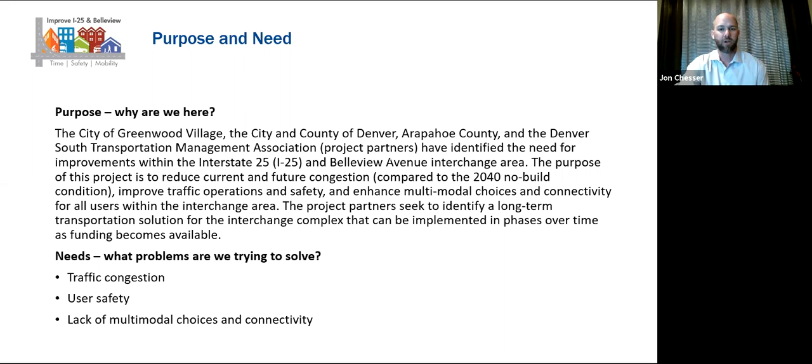Are we answering these questions? Are we staying true to why we're here and what problems we're trying to solve? And we've been able to do that, and this has been a good guide for us throughout that process.

So I'm going to talk a little bit here about the evaluation criteria. Another piece that was consistent throughout, after we developed the purpose and need, was: okay, how are we going to evaluate these alternatives? First, against the purpose and need, making sure that it meets that and checking for fatal flaws, and then looking at comparing alternatives against each other. What metrics are we going to use? What performance metrics are going to be available for us to look at? This was settled on by the entire technical advisory committee and then eventually the executive committee as well.

We were looking at traffic operations, safety, and multimodal for pedestrians, bicycles, and transit. Community impacts was a huge part of the conversation, from access to environmental, right-of-way, and then construction and constructability. Those are very important pieces in deciding which alternatives operate better than others as we move through the screening process.

And then, of course, cost. Cost is a big factor. Money doesn't grow on trees. We all understand the financial situation that we find ourselves in this industry. Money is limited, and so we have to be smart about how we spend it. Cost was a part of our conversation.

So it's really important to understand that both the purpose and need, and the evaluation criteria here, once developed in late 2018, stayed consistent all the way through. As we got into different conversations from a technical standpoint, it was important to bring ourselves back and say, hey, are we staying true to these performance metrics that we agreed on? Have we answered all of these questions as we go through the process?

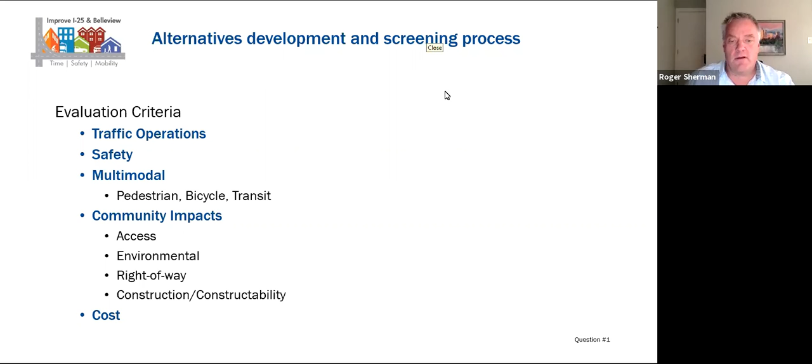We'll give it a minute to let everyone vote that's on the meeting before we close this out. We're moving along quickly, got about half of you voted. All right, last call for those that would like to vote. We appreciate your input. I'm going to end the poll and I will share the results with everyone, and hand it back to Jon.

Thank you, Roger, really appreciate that. And thank you everybody for participating in the poll. This information is really important for us to understand how the process that we've been executing matches up with the values and priorities that the users of the interchange have. It will help us give context to the comments and questions we get throughout this public involvement period. There's really interesting information here. It looks like pretty clear favorites toward traffic operations and community impacts. That's pretty consistent, and I think that's great information.

So again, thank you all. We will have two more poll questions as we go through the presentation here, so please look for those. We'll bring Roger back on to execute those for us.

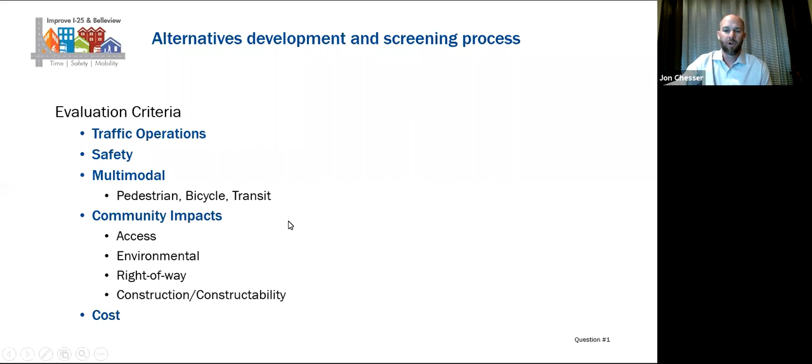All right, so back into the presentation here. We went through a three-tiered alternatives development and screening process, and I'm going to go through the details. A lot of that information is on the full presentation video from October 7th, up on the project website, where we go into a tremendous amount of detail about each of these screening areas. What's important to understand is that we start with a wide range of alternatives.

We compare those against the purpose and need, making sure they meet the answers to the questions. Level one is based on fatal flaw: is there anything in the alternative that makes it a fatal flaw? It simply can't be built, isn't possible, can't be constructed, something like that. We only had two alternatives screened out from a fatal flaw perspective: new crossings of I-25 from the landmark south of Belleview, and those were felt by the project team, everybody involved, to be a fatal flaw.

Then we moved into level two screening, a qualitative analysis. There were about 10 interchange alternatives that made it through to level two. The important thing here is to understand we're no longer comparing alternatives against a fatal flaw or against purpose and need — these have all been demonstrated to meet those requirements. Now we're comparing alternatives against each other, so it's a matter of how well the alternatives operate compared to the other alternatives in the list. It's not that some alternatives screened out on level two wouldn't work, they just wouldn't work as well as the alternatives that made it forward into level three.

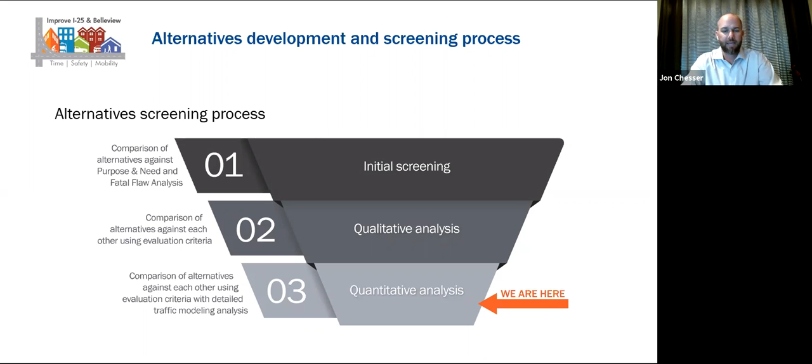We're here towards the end, wanting to present the information to the public, get feedback and comments on the process, and see where we are before that final decision is made. So let's jump right in.

Before I dive into the SPUI, one of the alternatives that made it through to level 3 screening was a diverging diamond interchange. Early on in the quantitative traffic analysis, that alternative was found to not measure up. In fact, it was operating worse than the no-build condition, meaning if we do nothing out here. Any alternative operating worse than no-build doesn't make sense to pass forward, so it was screened out early in level 3, leaving us with 2 main build alternatives and the no-build, which we put through detailed traffic analysis.

The first of those is the SPUI, a split diamond or single point urban interchange, affectionately called the SPUI. It takes the 2 ramp intersections that exist today, the I-25 ramp intersections that come down to Belleview, and consolidates them into 1 intersection underneath the I-25 bridge. Those 2 ramps converge to a point under the I-25 bridge. This helps traffic operations immensely because it takes 4 signalized intersections and makes them 3. Just by removing 1 signalized intersection, you get a benefit of operations on Belleview Avenue itself. That's the big key to a single point and why it was so effective in our analysis.

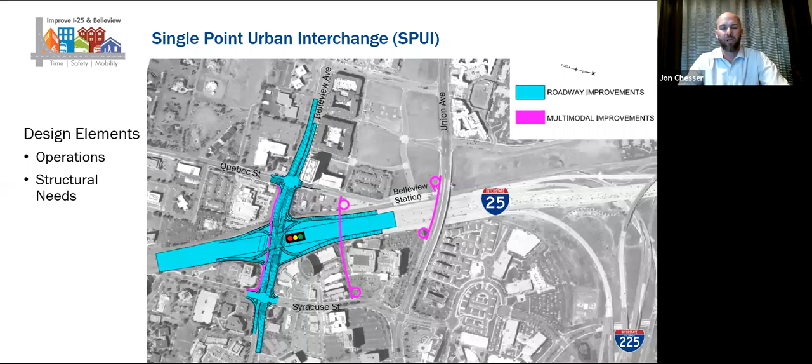All right, back to the SPUI. How is this thing going to operate? In order to build the SPUI, we need some pretty significant reconstruction on Belleview itself. This is important to note because lanes are being added and different lane configurations incorporated, which will impact Belleview Avenue during construction. It's an important piece for users of the interchange to be aware of.

Significant reconstruction of Belleview Avenue is necessary because all of the improvements in a single point are on that main road, Belleview Avenue in this case. So the light blue here indicates where that reconstruction would need to take place on Belleview.

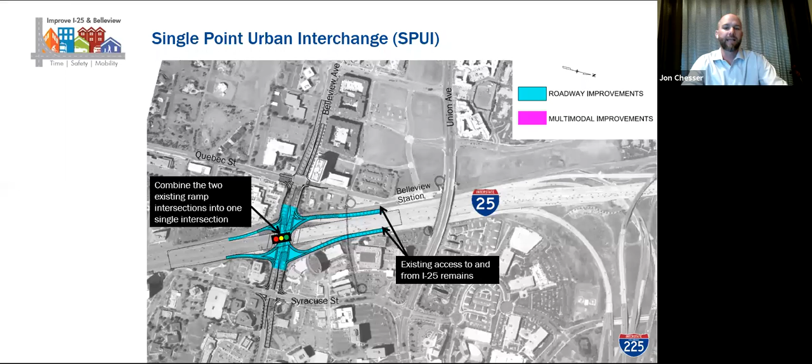This slide indicates where those ramp terminals come in. So all 4, southbound and northbound, will come into that single point, that single intersection underneath the I-25 bridge, which we talked about earlier, and again is part of the benefit that you get in traffic operations, consolidating from 4 intersections down to 3.

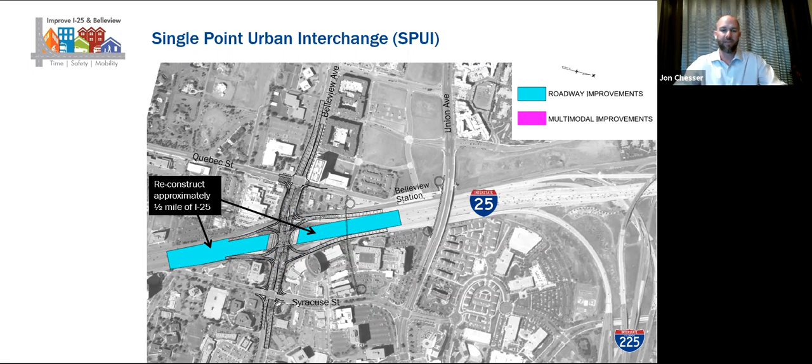In order to provide that intersection underneath I-25, about a half a mile of I-25 is going to need to be reconstructed as well. This extends about a quarter mile north and south of Belleview itself. And the reason I-25 needs to be reconstructed is that the bridge, the I-25 bridge over Belleview, needs to be replaced.

This is because in order to create the SPUI underneath, the bridge needs to raise in profile by about 8 feet. Now, it's important to note that CDOT has told us, as a project partner all the way along, this bridge does not need to be replaced. It's not structurally deficient. It meets all of its safety requirements.

So it's a good functioning bridge today and doesn't need to be replaced. What requires the replacement is that full interchange underneath I-25. Profile of I-25 at the bridge needs to go up 8 feet, and that needs to chase out a quarter mile in each direction to be able to tie into the existing grade of I-25. So the SPUI requires reconstruction of Belleview Avenue and a small reconstruction here on I-25 as well with the bridge.

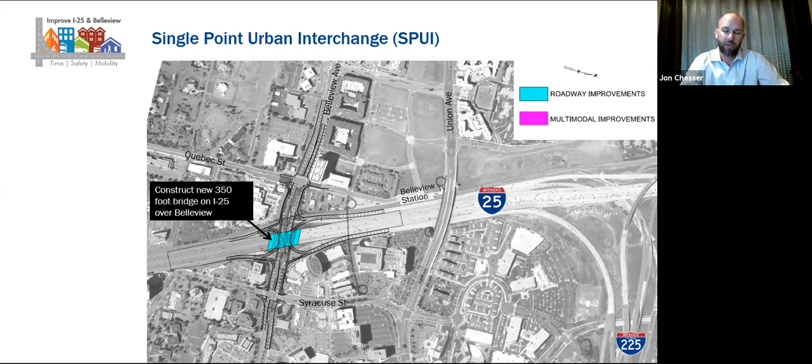So let's talk about the SPUI itself, technical advantages of the SPUI. Again, this is one of our final two alternatives along with the no build that we've come to here through our alternative screening process. Why does the SPUI work? What are the advantages of the SPUI? Well, it takes those 3 or 4 intersections and reduces them to 2. The 2 ramp intersections become 1.

There's also an overall lower risk of environmental impacts based on the conceptual design and where we sit today. There are no improvements for the SPUI outside of Belleview Avenue and I-25. So some of the local roads like Union, for example, are not impacted. They're not improved by this alternative. And so the community feel and sort of the northern part of that interchange is maintained by locating the improvements on Belleview and then construction on I-25. Lower estimated right-of-way impacts, and of course it includes the grade separated crossings of I-25, the bicycle and pedestrian crossings.

So at this point, before we jump into the second of our 2 alternatives here, we want to take a break, bring Roger back in for a poll question. And this poll question really is focused on the SPUI itself, not in comparison to anything else, but based on what you just heard for the SPUI, how does that meet your needs as a user? So Roger, do you want to pull up that specific poll question and dive into it?

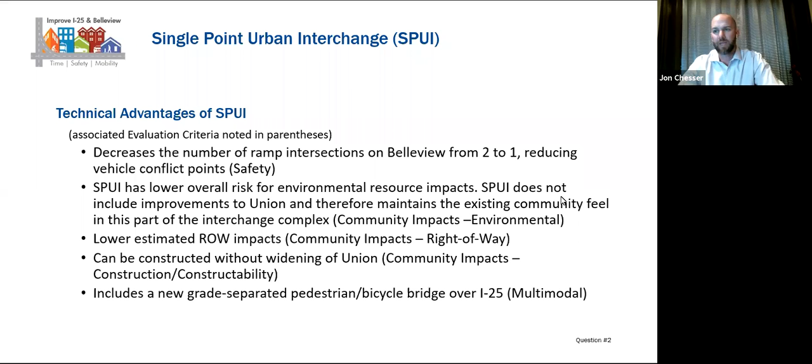Yeah, great. I appreciate that, Roger. This is great information for us to be able to understand how this information is being received, and for you guys to let us know how this particular alternative seems to meet your needs. There'll be more information as we go through the rest of the presentation tonight, but that was a good snapshot for us to be able to understand your thoughts on the SPUI there. So thank you so much again for providing information.

All right, let's take a look at the second of our 2 final alternatives here, this being the split diamond interchange with Union. So this one, instead of the impacts and improvements being focused on Belleview and I-25, the impacts here are focused on a new intersection at Union. So how this will operate is that it takes the single interchange at Belleview and splits that into 2 different locations. So folks will still be able to access Belleview and they'll be able to access Union in this new configuration.

What that does is disperse traffic throughout the interchange in a different way, using multiple locations for access as opposed to just the one on Belleview, which has some impacts throughout the interchange that we're going to talk about here in a second. So by constructing the interchange this way, the big point with the split diamond and why it advanced to this stage of the project is it relieves traffic on Belleview and disperses it throughout different parts of the interchange.

About 12 to 15% of the traffic on Belleview is reduced in this alternative. By taking 12 to 15% of the cars off of Belleview, Belleview operates better. It makes a major difference in the model. 12 to 15% in this kind of instance is huge - that's a really big reduction in traffic volumes, just folks wanting to utilize that roadway.

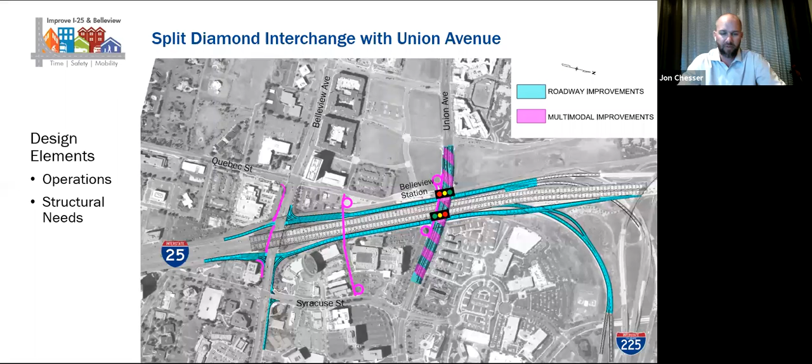And then you'll see blue and pink hatched on Union. There are both roadway improvements and multimodal enhancements as mitigation for Union Avenue itself, by putting two new intersections up there - you see the two stoplights on Union. Those are two new intersections that do not exist today that will carry traffic from I-25 and I-225 to Union, and then traffic can proceed on to Belleview.

So let's get into a little bit of the details of how the split diamond will operate. First, northbound: the difference is that folks wanting to access the northern part of the interchange would have multiple options. Folks getting off I-25 northbound at Belleview can go east and west on Belleview, or they can proceed on a new ramp road that will be elevated from where it is today and will meet up with Union as it crosses I-25, where it'll come to a new intersection. Folks can go east and west at that intersection, or they can proceed north and access I-25 and 225. So access to and from I-25 and 225 on Union is the big difference here.

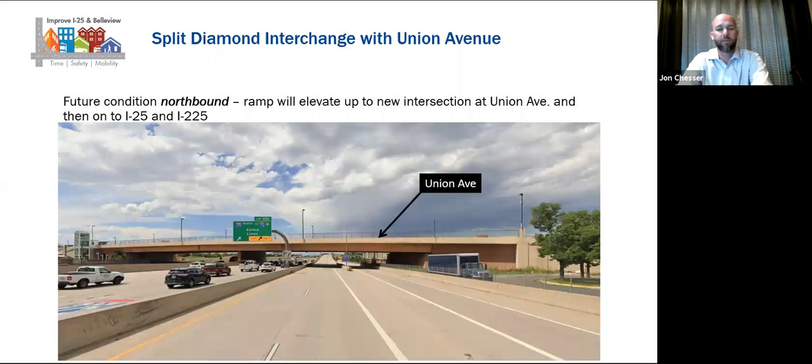Let's take a look northbound. This is what we see today - the ramp from Belleview northbound to I-25 and to 225 currently proceeds underneath Union. In the proposed configuration for the split diamond, this ramp would go up to and meet at Union with a new intersection, and folks would be able to access Union Avenue or continue on to I-25 and 225. So it takes this current ramp that goes under Union and elevates it to meet up at grade with Union.

Same thing - if you are on Belleview or you are on Union, you have access to I-25 northbound. This is a more important part to articulate. If you're on Belleview, you'll be able to access I-25, making that turn to go northbound at the same location you do today at the end of that ramp terminal. You'd proceed up to Union, go through that Union intersection, and get on I-25. If you are on Union, the new piece here is that you will be able to access I-25 northbound without having to go down to Belleview - you'd be able to access I-25 northbound right from Union. So again, dispersing traffic in a different way, getting folks to where they want to be more efficiently.

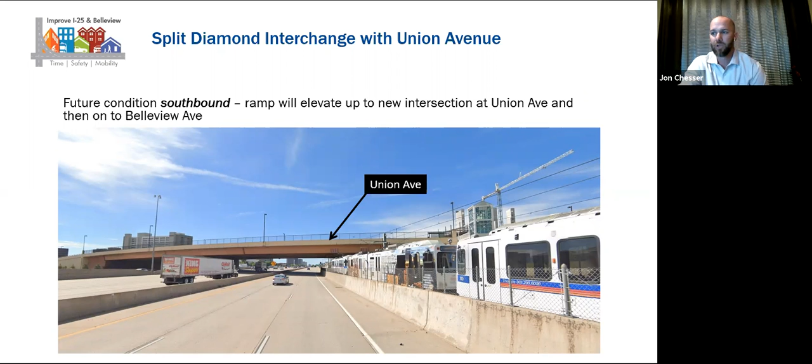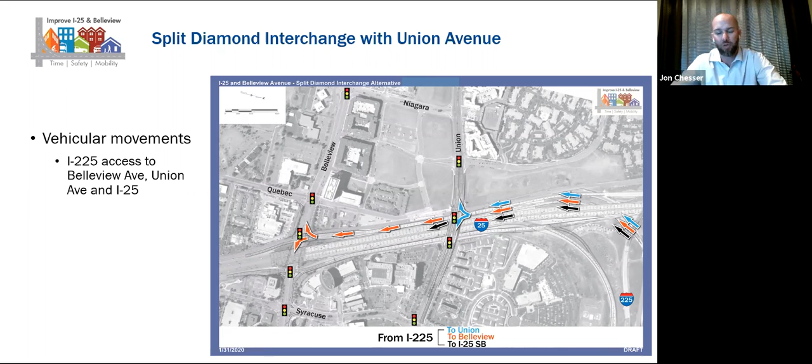If you're on Union and Belleview and you want to access southbound I-25, you'd be able to do that through this interchange design as well. And then folks from 225, if they want to go southbound on I-25, those black arrows, just as they do today, same movement, nothing changes. If folks from 225 want to access Union, they'd be able to now go up to the new intersection on Union, go east-west. If folks from 225 wanted to access Belleview, they would go up to the Union, proceed through that intersection and down to Belleview where you can go east and west.

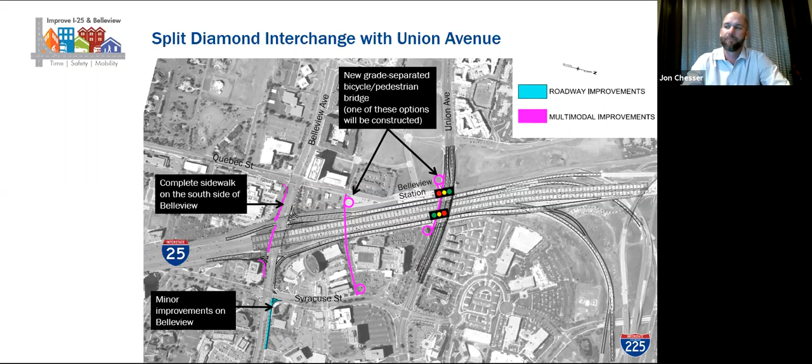So Union Avenue itself. Now we've talked about not much impact to Belleview at all. No impact to I-25 - that stays open all the way through construction. No need to replace the bridge. So where are the impacts? The impacts are on Union.

We're creating 2 new intersections on Union that don't currently exist today. So those 2 new intersections will go in. As part of that, we've been working with our project partners, our stakeholders throughout on what impact that will have on the multimodal connectivity - folks using Union for bikes, for pedestrians, as transit. And so we've worked with the team to be able to understand what those impacts could be and build in some mitigation to help offset some of those impacts.

So we're talking about wider buffers between the sidewalk and the bike lanes, buffers between the bike lanes and the transit lanes, being able to provide that flexibility for folks to still be able to get across Union on a bike or walking. And if the added traffic on Union is too much of an impact, that grade separated crossing of I-25, the new one that's going in, would provide that flexibility, another option for folks to be able to get across I-25.

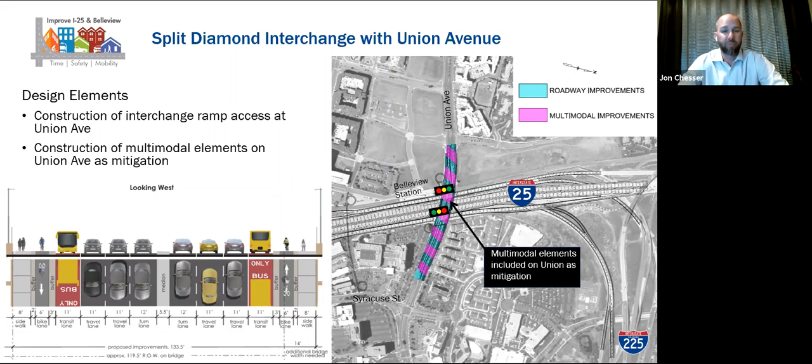So let's talk a little bit about the technical advantages of the split diamond. Based on all of the performance metrics for traffic operations as a whole, this alternative operates best for vehicle traffic operations throughout the interchange. Again, that's because by being able to reduce traffic on Belleview, the increased traffic on Union, folks are getting to where they want to be more efficiently. That allows the interchange as a whole to operate better. And so that's important to note here.

The other thing is this alternative can be constructed without replacing the I-25 bridge over Belleview, without impacting I-25, and with minimal impacts to Belleview. That's important from a construction standpoint because the construction impacts to the traveling public are less in this alternative. Again, this alternative includes the grade separated bicycle pedestrian crossing of I-25. So that's involved in both, part of both alternatives here.

So similar to the last question, we want to bring in Roger, ask a poll question here. The split diamond in and of itself, based on the run through that we just heard, how does that alternative meet your needs? Roger? All right, here we go.

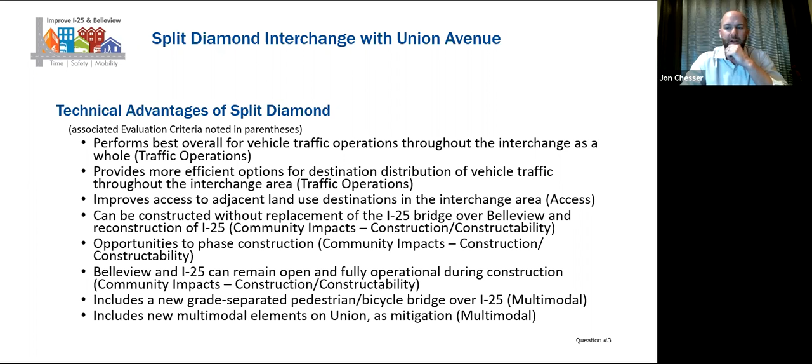It's not a vote. All right, let's take a look at overall a comparison of the split diamond and the alternative, and kind of what the analysis, what the technical data is telling us. So we have a lot of data that goes into this slide, trying to make heads or tails of two alternatives that are really apples and oranges.

There's not a whole lot between these two alternatives that are the same. One heavily impacts Belleview and I-25, the other one doesn't, but it impacts Union. It's really hard to sort of find a lot of common ground.

The very bottom of the slide presents a statement that I want to make sure everybody understands and where there is common ground between these two alternatives. Both of them perform better than the no build.

This is important to understand. Both the SPUI and the split diamond perform better than the no build in all evaluation criteria except a couple. Cost being one, there's no cost with the no build, and so it wins on cost. It also wins on construction impacts because there is no construction. So aside from those two obvious categories, both of these alternatives perform better than the no build.

Now, apples and oranges sort of play out in this summary of the evaluation criteria as you go down through and look at it. If you look towards the bottom, second to last toggle, construction and constructability. The opportunity in the split diamond to be able to leave Belleview and I-25 open during construction, that's huge for construction impacts. The split diamond also has the ability to be phased over time. You could do just the east side, just the west side. The phasing allows more flexibility, more opportunity to construct this in a way that has less impact on the traveling public.

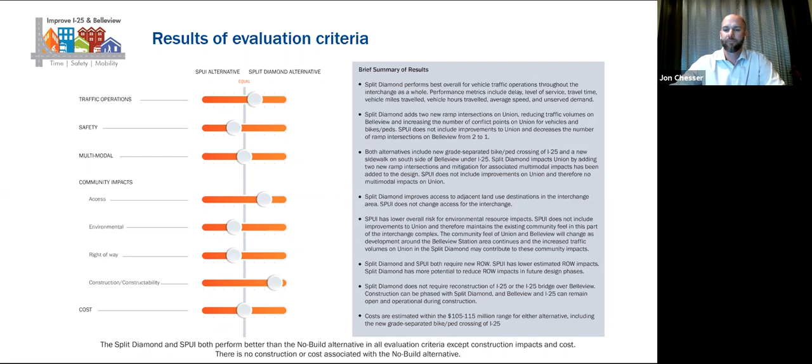Okay, a couple things that we want to dive into now that are a little bit more specific to how these alternatives are going to affect the communities around. One of the things we learned early on, with whatever alternative is ultimately chosen to move forward, is that the interchange operates better if you improve Quebec, or the Quebec and Belleview intersection, and the Syracuse and Belleview intersection.

Those are key. Both of the alternatives, the SPUI and the split diamond that we're looking at for the interchange, include improvements to Quebec and to Syracuse intersections. We're still working through all of those and what those can be. There's a couple different options that we have sort of on the table, and that's being advanced to the next level of design because we simply don't have the right level of design at this conceptual stage to be able to answer all of the questions associated with those intersection impacts.

What we have been able to determine is that by adding those intersection improvements to either the SPUI or the split diamond, traffic operations get better. They get a little better in the split diamond than they do in the SPUI, but these intersection improvements enhance both alternatives moving forward, and they will be a part of the design of the project moving forward. We just need a little bit higher level of design to be able to figure out what is the best improvement at each of those intersections. So please know that is something that will be carried forward in the project.

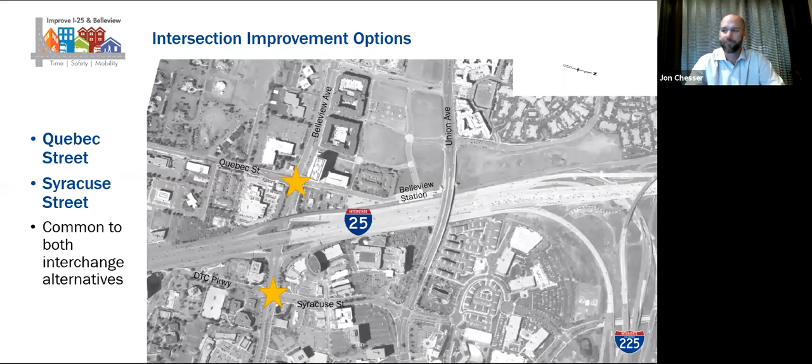All right, let's talk some specifics about Cherry Hills Village. We've been working first with Jim Thorson and now with Chris Kramer, city engineers with Cherry Hills Village, who've been part of our TAC. The mayor has been part of our executive committee from the beginning. We understand there are a couple very specific questions and topics that Cherry Hills Village wants addressed as part of this improvement, wants more information, wants to understand. So part of what we get to do tonight is talk about those in more detail.

Cut-through traffic throughout Cherry Hills Village, and how is that affected by the interchange improvements we're discussing here? We'll look at that on the next slide. The overall traffic operations analysis has shown us that the SPUI and the split diamond neither benefit nor impact the existing traffic volumes in the specific Cherry Hills Village connection areas where we typically see cut-through. That's at Quincy and Happy Canyon. So Quincy, Monaco, and Happy Canyon is a gateway intersection for the community. We understand that—Cherry Hills Village representatives have been very clear on that. So how do these two alternatives affect that intersection?

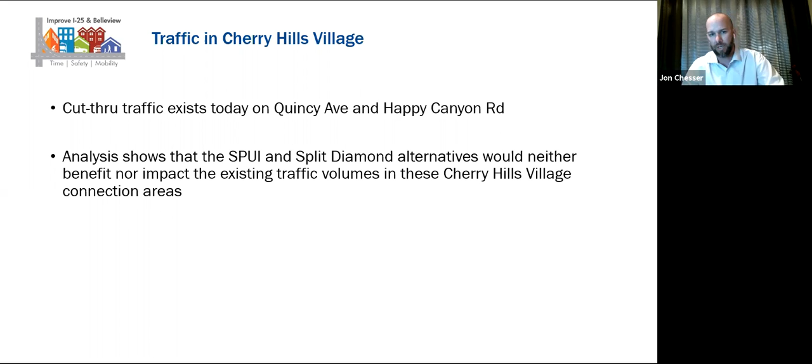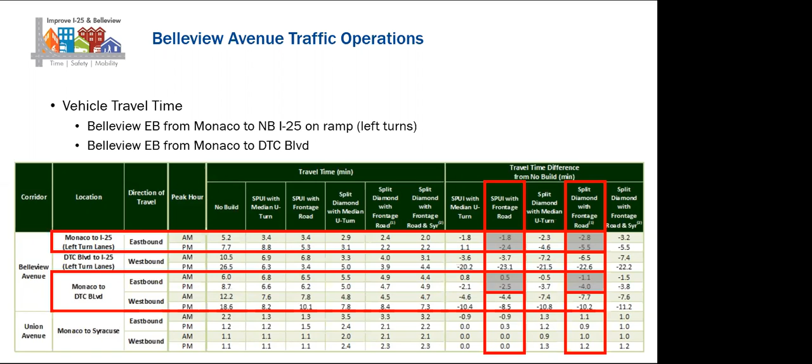I just saw a fundamental maybe misunderstanding of the analysis, and that is we're not talking about existing - we're talking about the 2040 no build. That is what we're comparing it to. Good point - keeping in mind that traffic is growing, it will increase by 2040, so if we do nothing, the congestion that we see today would become worse. I'm really glad you jumped in there, Maureen - I was hearing that a different way, but yes. So all the comparisons that you see on a chart like this are compared to the 2040 no build, not to what you see today. And yeah, those traffic numbers are going up between today and 2040, even in the no build condition - on Union and on these side streets, traffic volumes are projected to go up. Thank you, Maureen, that was great.

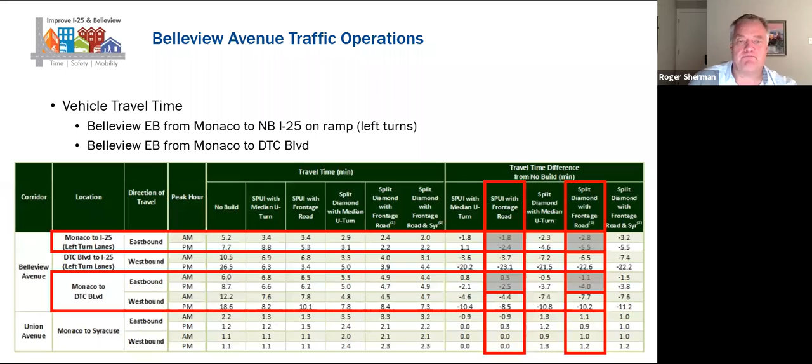All right, here we go. How does eastbound traffic and northbound traffic from Quebec access northbound I-25? It says it does not solve the access currently. Okay, read the beginning part again, please. How does eastbound traffic and northbound traffic from Quebec access northbound I-25?

Yeah, so in either alternative, folks would be able to access northbound I-25 from those locations the same way they do today. So folks traveling northbound on Quebec would make that right turn, and they would take the lefts to get to northbound I-25.

What isn't discussed here in greater detail are those intersection improvements at Quebec and Syracuse. We're still too conceptual in the design phase to understand how each of those will work, but we fully understand as a project team that without addressing the Quebec and Belleview intersection itself, and how to move people through it, we're not answering our full purpose and need here.

So we've taken a look. There are a few different options at Quebec and Belleview that enhance both the SPUI and the split diamond from an operations standpoint, and would allow folks to get through that intersection more efficiently. We just need another level of design to flesh those out in more detail, but they've been shown to improve either alternative option. We are fully aware Quebec is immensely important to the overall operations of the interchange here.

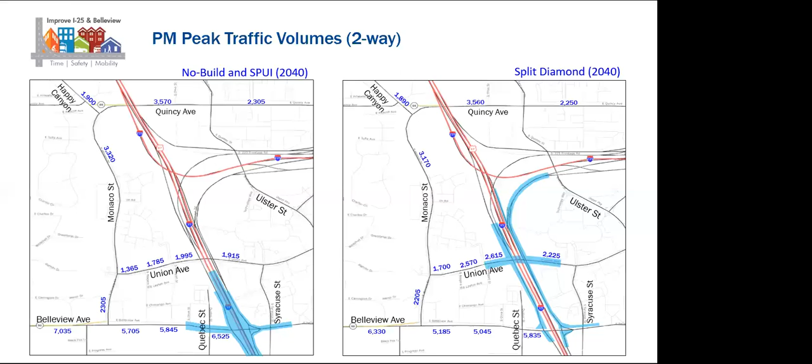John, you mentioned Syracuse too. Both of those intersections are very close to the ramp termini, so additional improvements are needed. And the other part is that if we reduce traffic on Belleview, it will be improved. Agreed. All right, last question that we've got.

There's a couple others. Will northbound Quebec be redesigned so no direct access is allowed to Belleview? It's pretty similar to the answer we just gave on intersection improvements at Quebec, so I think that answer covers it. We are looking at what the issues are at Quebec. The main issues there are the left turns. There's not enough queuing, and as the left turns occur, folks get stuck out in the intersection, and it messes with the rest of the movements people want to make. So we're looking at ways to address specifically the left turns at Quebec and Belleview, and again augment, support, and enhance the two interchange alternatives we're talking about. In either alternative, we'll be looking at those improvements at Quebec and Belleview.

Was there one more question, Roger? Nope, that is it in the queue.